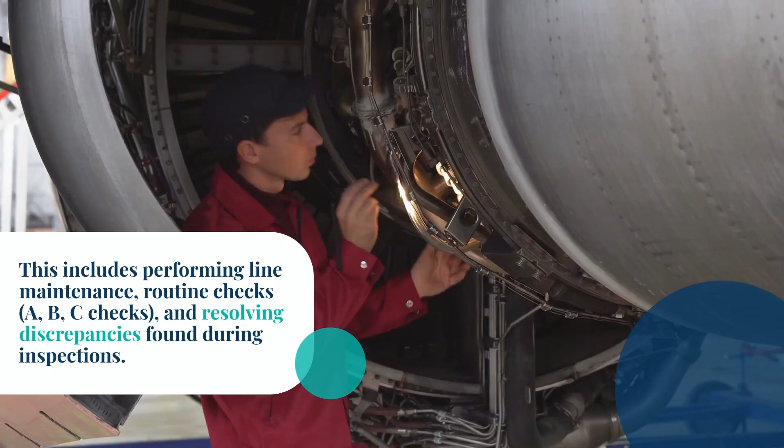1. Can you describe your experience with aircraft maintenance and repair? Throughout my career, I've gained hands-on experience in both scheduled and unscheduled aircraft maintenance. This includes performing line maintenance, routine checks (A, B, C checks), and resolving discrepancies found during inspections. I've worked on hydraulic, pneumatic, electrical, and fuel systems, ensuring all repairs meet airworthiness standards.

My role often involves troubleshooting faults, replacing defective components, and performing system tests to ensure reliability and safety. I've also been responsible for maintaining detailed maintenance logs and coordinating with technical teams and OEMs to resolve complex issues. My experience has taught me to work efficiently under pressure, especially during aircraft turnaround times. I consistently follow the Aircraft Maintenance Manual (AMM), Illustrated Parts Catalog (IPC), and all relevant regulations. My goal is to keep aircraft airworthy while minimizing downtime, ensuring safety and efficiency are never compromised.

2. What types of aircraft have you worked on previously? I have worked on a range of commercial and regional aircraft, gaining experience on Boeing 737 and Airbus A320 family jets, as well as Embraer 190s. My responsibilities included performing line maintenance, fault diagnostics, and major overhauls on these aircraft types. I've also been involved in component replacement, software updates, and system checks specific to each aircraft's design and operational requirements. Working across different models has helped me understand their unique mechanical and electronic systems, maintenance planning, and OEM compliance procedures.

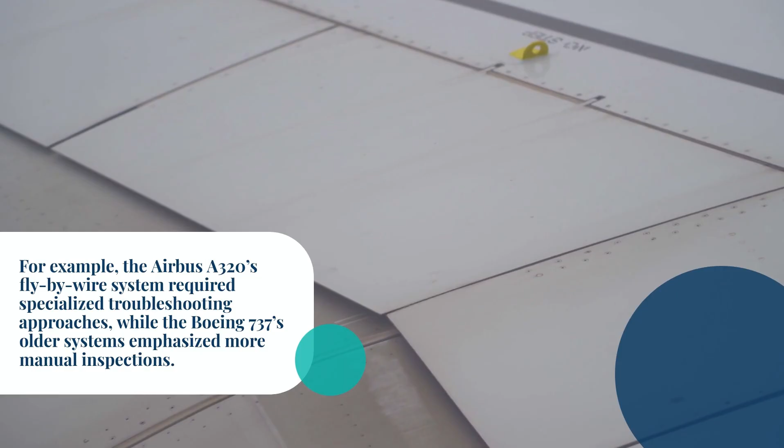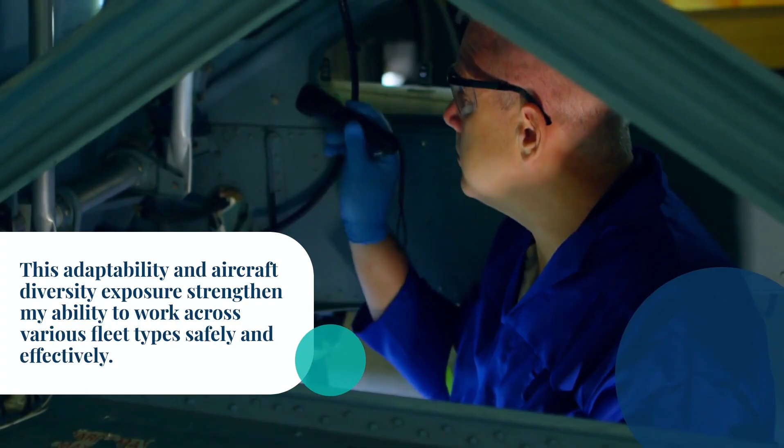For example, the Airbus A320's fly-by-wire system required specialized troubleshooting approaches, while the Boeing 737's older systems emphasized more manual inspections. My broad experience allows me to adapt quickly when transitioning to new aircraft types, and I consistently refer to each model's specific AMM and fault isolation manuals (FIMs). This adaptability and aircraft diversity exposure strengthen my ability to work across various fleet types safely and effectively.

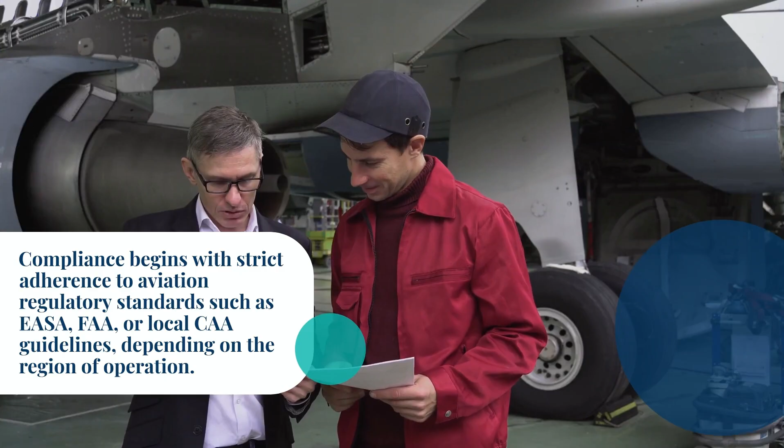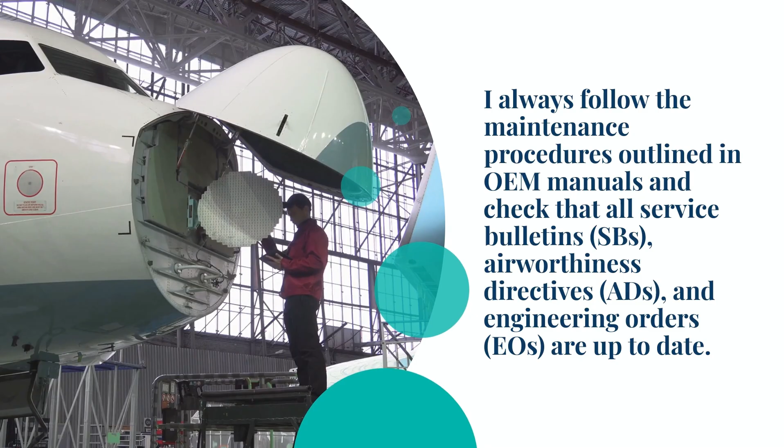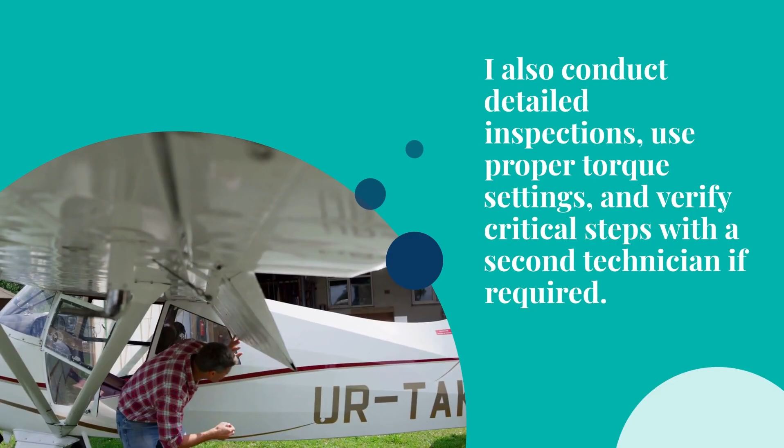3. How do you ensure compliance with aviation safety regulations? Compliance begins with strict adherence to aviation regulatory standards such as EASA, FAA, or local CAA guidelines, depending on the region of operation. I always follow the maintenance procedures outlined in OEM manuals and check that all service bulletins (SBs), airworthiness directives (ADs), and engineering orders (EOs) are up to date. Before performing any task, I review the latest documentation and ensure required tools and parts meet calibration and certification standards. I also conduct detailed inspections, use proper torque settings, and verify critical steps with a second technician if required.

Accurate record keeping is essential. I ensure all work is logged in the maintenance management system and signed off by appropriately licensed personnel. Regular training and audits help me stay informed of any changes in safety regulations. Ultimately, compliance is about fostering a safety-first mindset across the team, encouraging accountability, and never cutting corners regardless of time or budget pressures.

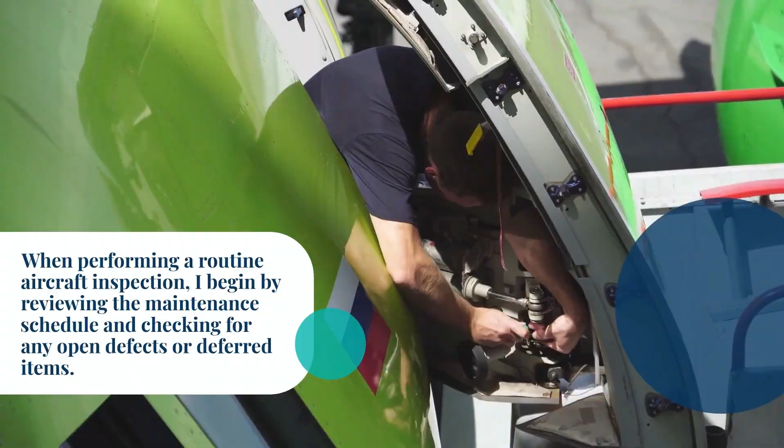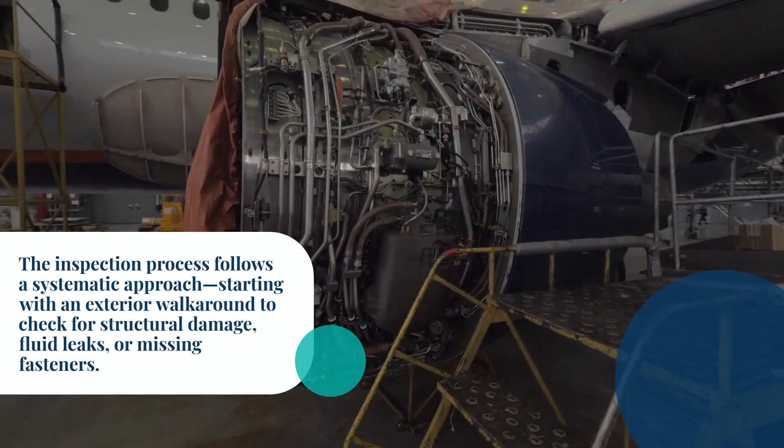4. What steps do you follow when conducting a routine aircraft inspection? When performing a routine aircraft inspection, I begin by reviewing the maintenance schedule and checking for any open defects or deferred items. I gather the necessary tools, manuals, and safety equipment, and verify the aircraft's documentation to confirm airworthiness status. The inspection process follows a systematic approach, starting with an exterior walk-around to check for structural damage, fluid leaks, or missing fasteners. I then move to internal systems, examining avionics, hydraulics, landing gear, control surfaces, and engine compartments based on the inspection type, e.g., A-check or

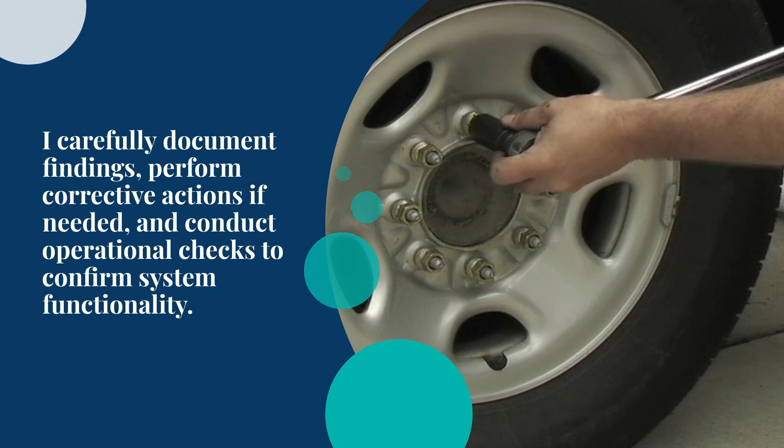C-check. I carefully document findings, perform corrective actions if needed, and conduct operational checks to confirm system functionality. Finally, I update the technical logs, ensuring all entries are accurate and signed off. Safety is prioritized at every stage, and inspections are never rushed, regardless of time constraints.

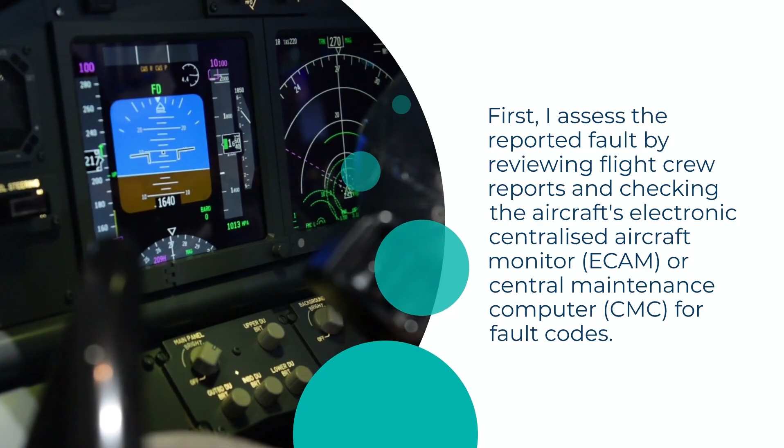5. How do you handle unexpected technical issues during a pre-flight check? When an unexpected issue arises during a pre-flight check, I remain calm and follow a structured troubleshooting process. First, I assess the reported fault by reviewing flight crew reports and checking the aircraft's Electronic Centralized Aircraft Monitor (ECAM) or Central Maintenance Computer (CMC) for fault codes. I consult the Aircraft Fault Isolation Manual (FIM) or Troubleshooting Manual to identify potential causes.

After isolating the issue, I perform visual and operational checks, using calibrated tools or test equipment if necessary. If parts need replacement, I ensure correct part numbers and certifications before installation. All actions are documented in the aircraft's technical log, and I consult with senior engineers or maintenance control if the issue is complex or time-sensitive.

Communication with the flight crew is key, keeping them updated while ensuring no compromises on airworthiness. If the issue can't be resolved in time, I recommend grounding the aircraft until fully rectified.

What is your experience with avionics systems and troubleshooting them?

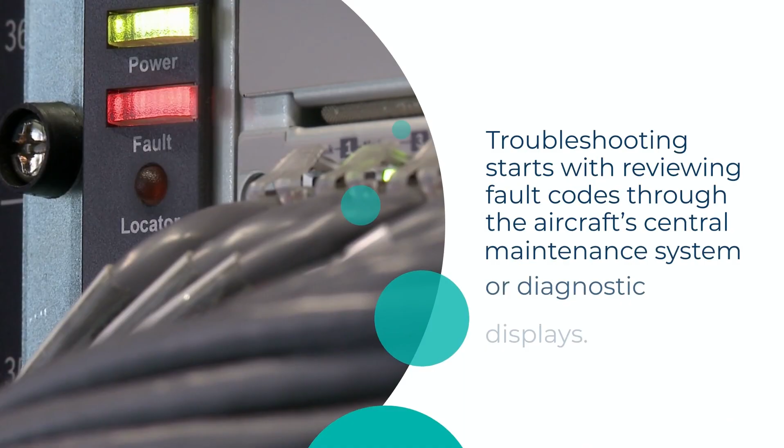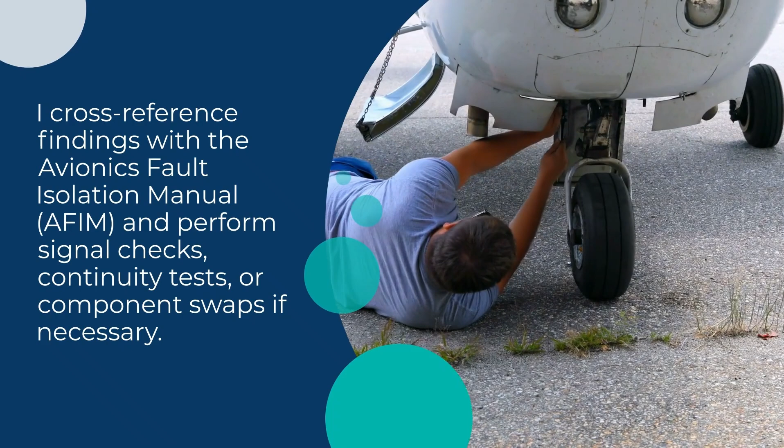I've worked extensively with avionics systems, including flight management systems (FMS), autopilot, communication and navigation equipment, and electronic flight instrument systems (EFIS). Troubleshooting starts with reviewing fault codes through the aircraft's central maintenance system or diagnostic displays. I cross-reference findings with the Avionics Fault Isolation Manual (AFIM), and perform signal checks, continuity tests, or component swaps if necessary. I've resolved issues such as unreliable altitude readings, navigation discrepancies, and faulty transponder responses.

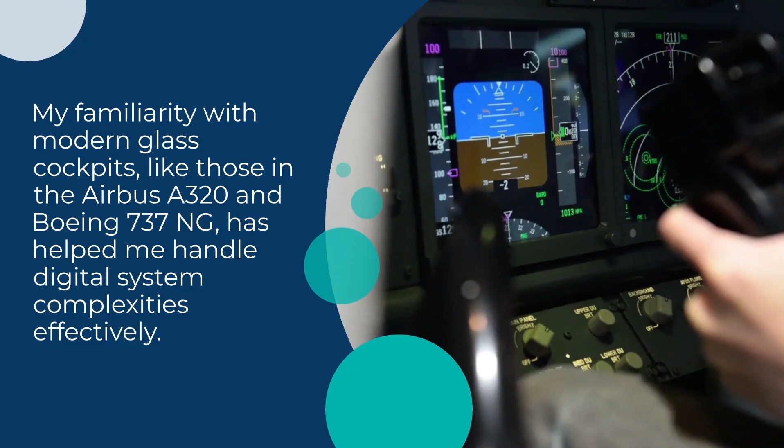My familiarity with modern glass cockpits, like those in the Airbus A320 and Boeing 737NG, has helped me handle digital system complexities effectively. I always verify software configurations and ensure firmware updates are correctly applied. Safety and documentation are crucial, so every action is logged precisely, and repaired systems are tested thoroughly before return to service. I stay current with training on evolving avionics technologies, including satellite communications and integrated modular avionics (IMA), to maintain my troubleshooting proficiency.

How do you document maintenance and repair work?

Accurate and detailed documentation is vital in aviation maintenance. After completing any maintenance task or repair, I record the job in the aircraft's maintenance logbook and/or the airline's computerized maintenance tracking system, e.g. AMOS, TRAX, or CAMP. Entries include the date, time, aircraft registration, task card reference, description of the work performed, part numbers, serial numbers, and technician license numbers. I also record torque settings, test results, and any replaced components, ensuring traceability.

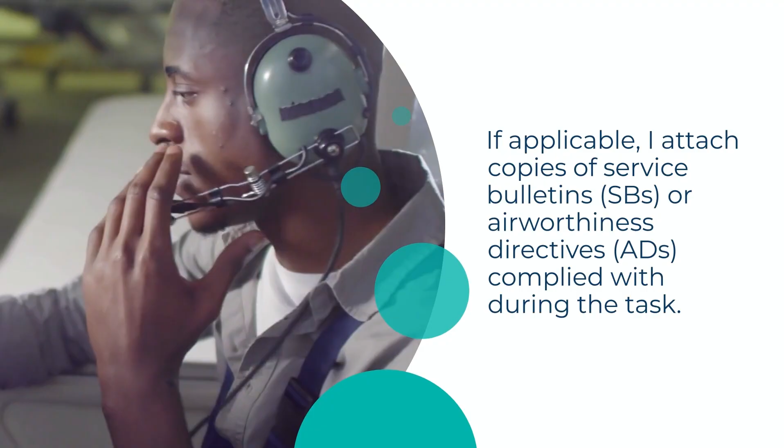If applicable, I attach copies of service bulletins (SBs) or airworthiness directives (ADs) complied with during the task. Once completed, I review the entries with a licensed engineer or inspector who signs off on the job. This ensures regulatory compliance and airworthiness. My approach is to always maintain transparency and accountability through clear, consistent records, which supports audits, improves reliability analysis, and contributes to the overall safety culture within the maintenance organization.

Describe a time when you found a critical fault in an aircraft. What did you do? During a routine A-check on an Airbus A320, I discovered a hydraulic leak near the landing gear actuator.

The leak was minor but located dangerously close to electrical wiring. I immediately reported the issue to the certifying engineer and isolated the aircraft to prevent further pressure buildup in the system. After referencing the Aircraft Maintenance Manual (AMM), I disassembled the affected section and found a cracked hydraulic fitting. I replaced the part with a certified component, cleaned the area thoroughly, and conducted a full hydraulic system pressure test.

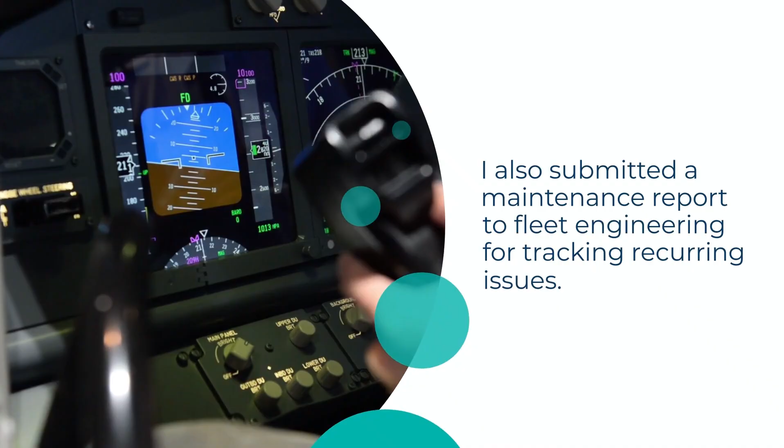Once the system was verified as leak-free, I documented the repair and had it signed off by a licensed engineer. I also submitted a maintenance report to Fleet Engineering for tracking recurring issues. This incident reinforced the importance of thorough inspections, even during routine checks, and demonstrated my ability to act quickly and responsibly when identifying safety-critical defects.

What are the most important checks during an A-check and C-check? An A-check is a relatively light, scheduled maintenance inspection performed approximately every 400 to 600 flight hours.

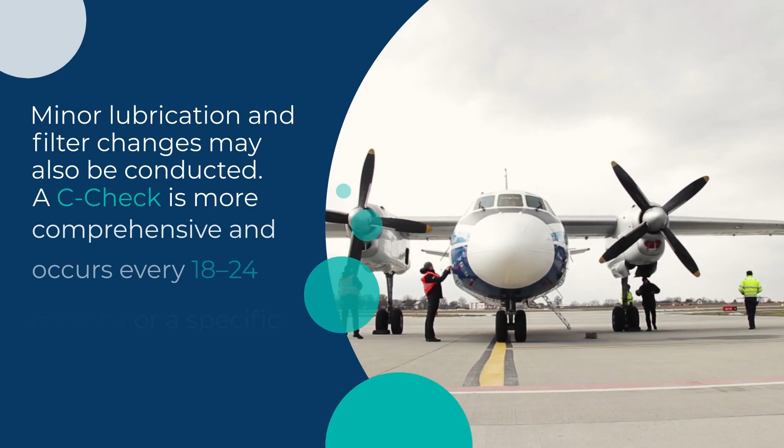Key tasks include checking fluid levels, inspecting emergency equipment, verifying avionics functionality, testing lighting systems, and visual inspections of the fuselage, wings, and engines. Minor lubrication and filter changes may also be conducted.

A C-check is more comprehensive and occurs every 18 to 24 months or a specific number of flight hours. It includes all A-check tasks plus in-depth inspections of aircraft structures, landing gear, cargo compartments, flight control systems, and major mechanical and electrical systems. Components are removed for inspection, non-destructive testing (NDT) may be used, and software or firmware updates are often applied. Cabin interior, safety systems, and corrosion control are also reviewed.

In both checks, adherence to task cards and manufacturer instructions is critical, as is proper documentation. Safety, compliance, and minimizing downtime are my top priorities during all inspection phases.

How do you stay updated with changes in aviation regulations and technologies? Staying current is essential in aviation due to constantly evolving regulations and technologies. I regularly attend in-house training programs and recurrent courses offered by my employer or certified training organizations.

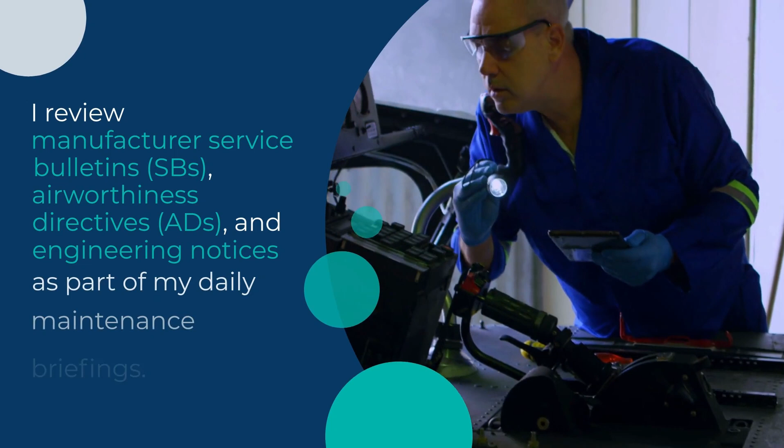I also maintain subscriptions to industry publications such as Aviation Week, Flight Global, and updates from regulatory bodies like EASA, FAA, and ICAO. I review manufacturer service bulletins (SBs), airworthiness directives (ADs), and engineering notices as part of my daily maintenance briefings. Online forums and communities like the Aircraft Maintenance Technicians Association (AMTA) and LinkedIn aviation groups also provide valuable insights from other professionals.

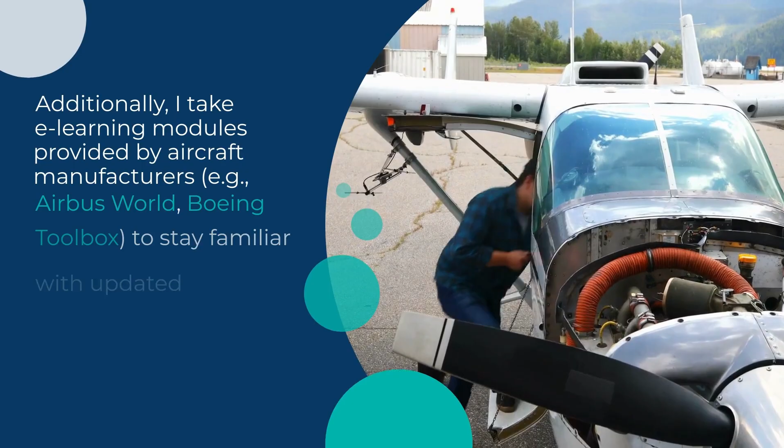Additionally, I take e-learning modules provided by aircraft manufacturers, e.g. Airbus World, Boeing Toolbox, to stay familiar with updated maintenance procedures and technological advancements like composite repairs, electric taxiing systems, and avionics integration.

Continuous learning ensures I maintain high standards in my work and can confidently implement new practices in a safe, compliant, and efficient manner. 11. What software tools or diagnostic equipment are you proficient in?

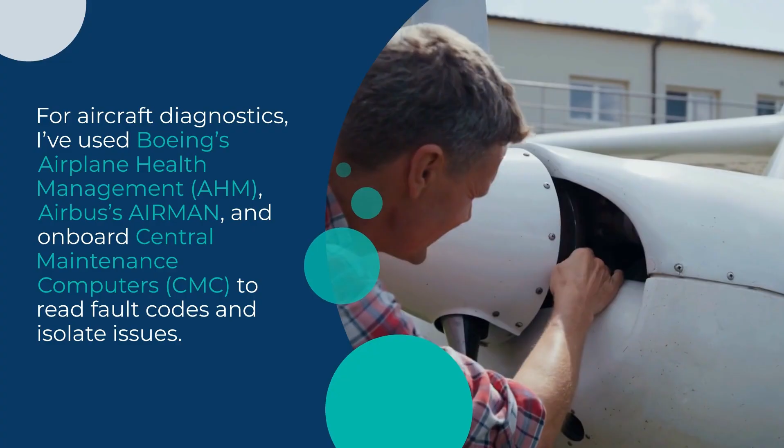I am proficient in several aircraft maintenance and diagnostic software tools, including AMOS, TRAX, and CAMP for maintenance tracking and planning. These systems help manage scheduled maintenance, monitor component life cycles, and ensure compliance with regulations. For aircraft diagnostics, I've used Boeing's Airplane Health Management (AHM), Airbus's AIRMAN, and onboard central maintenance computers (CMC), to read fault codes and isolate issues.

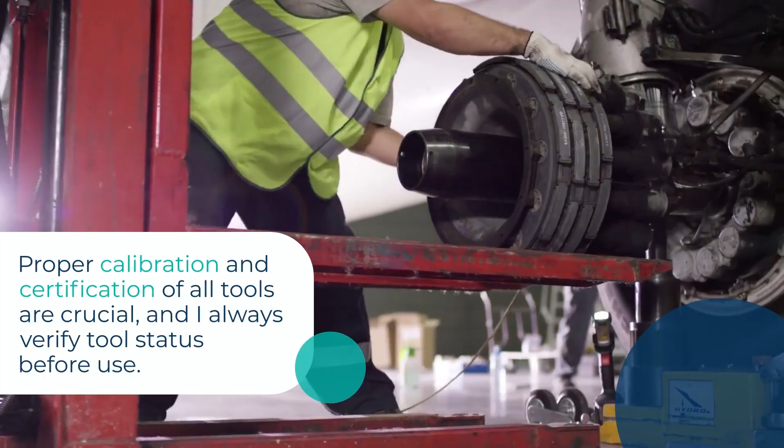I'm also comfortable using OEM-provided tools like Boeing Toolbox and Airbus World for technical documentation and service bulletins. In terms of physical diagnostic equipment, I'm experienced with multimeters, borescopes, pitot-static testers, and hydraulic pressure testers. I also use non-destructive testing (NDT) tools like ultrasonic and dye-penetrant kits during structural inspections. Proper calibration and certification of all tools are crucial, and I always verify tool status before use.

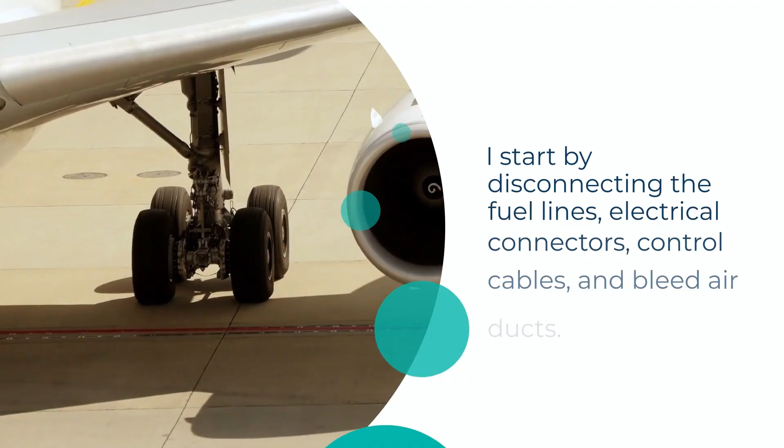Engine removal and installation is a precise, safety-critical process. First, I review the Aircraft Maintenance Manual (AMM) for the specific procedure and ensure all required tools, fixtures, and safety gear are available. I start by disconnecting the fuel lines, electrical connectors, control cables, and bleed air ducts. Then I deactivate and lock out relevant systems to prevent accidental operation. Once all components are disconnected, I support the engine with an approved stand or hoist and carefully unbolt it from the pylon or wing structure. Removal is completed with checks to prevent any structural or component damage.

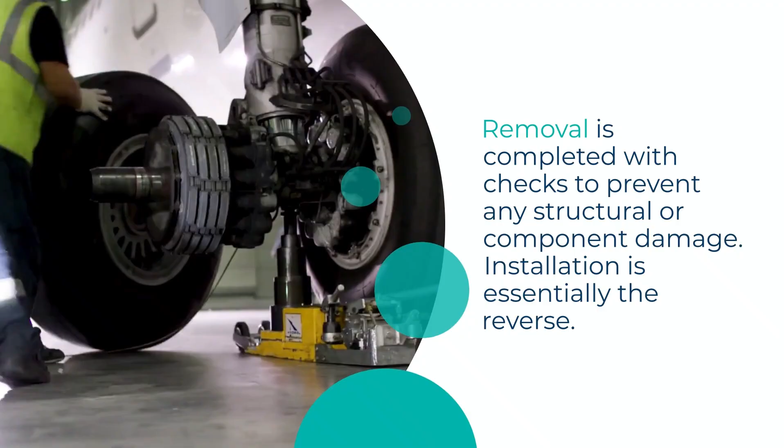Installation is essentially the reverse. The new or overhauled engine is aligned and mounted correctly using torque-specified bolts. All connections are reattached, secured, and double-checked. I then perform leak checks, engine run-ups, and operational tests to ensure all systems are functioning correctly. Detailed documentation and sign-offs follow, verifying the aircraft's airworthiness before return to service.

13. How do you ensure all work is completed according to the manufacturer's specifications? I strictly follow the Aircraft Maintenance Manual (AMM), Component Maintenance Manuals (CMMs), and other OEM-issued documents such as Service Bulletins (SBs) and Airworthiness Directives (ADs) for every task. Before starting a job, I review the relevant task card and cross-reference it with the latest version of the AMM to ensure instructions are current.

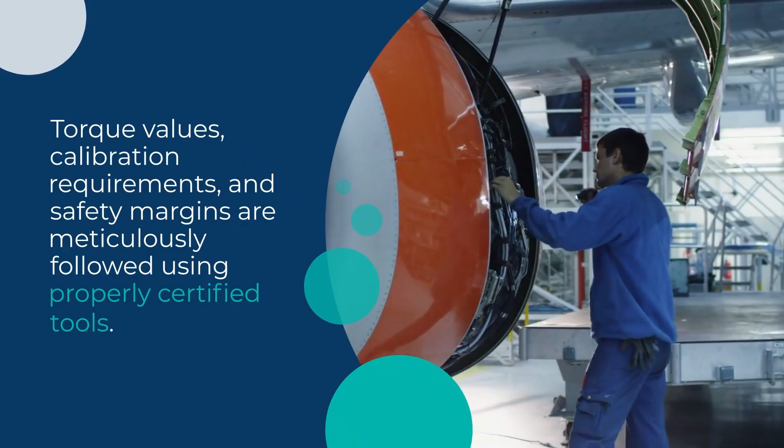I verify that all parts used have the correct part number, serial number, and airworthiness certification. Torque values, calibration requirements, and safety margins are meticulously followed using properly certified tools. During complex tasks, I consult with a licensed engineer or quality assurance inspector to double-check critical steps. Work is documented thoroughly, and inspections are conducted at each stage as needed. Additionally, I attend recurrent training and technical briefings to stay updated on procedural changes. Ensuring compliance with OEM standards is fundamental not only to safety, but also to maintaining the reliability and longevity of the aircraft.

14. What do you do if you disagree with another engineer's assessment? Disagreements in technical assessments can occur, and it's important to approach them professionally and objectively. If I disagree with another engineer's evaluation, I first seek to understand their reasoning by discussing the issue in detail and reviewing the documentation or fault data together.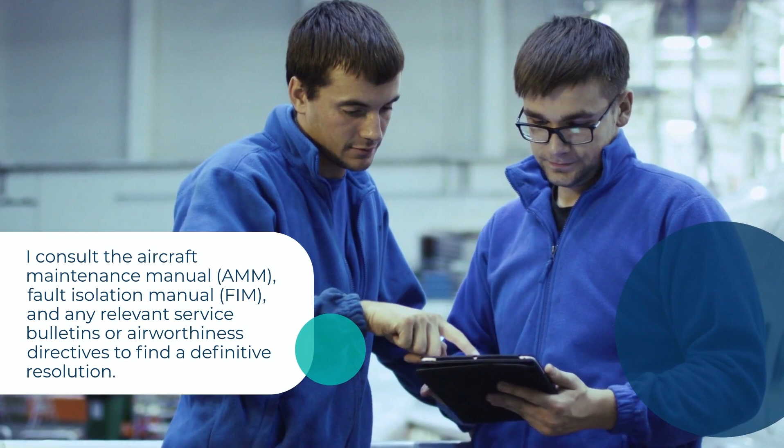I consult the Aircraft Maintenance Manual (AMM), Fault Isolation Manual (FIM), and any relevant service bulletins or airworthiness directives to find a definitive resolution. If the disagreement persists, I escalate the matter to a licensed certifying engineer or shift supervisor for a final decision. Safety is the top priority, so I never proceed with work unless I am confident the correct and compliant course of action is being taken. I document the issue accurately, noting any actions taken or advice received. Open communication and mutual respect are key to resolving such situations constructively and ensuring the continued airworthiness of the aircraft.

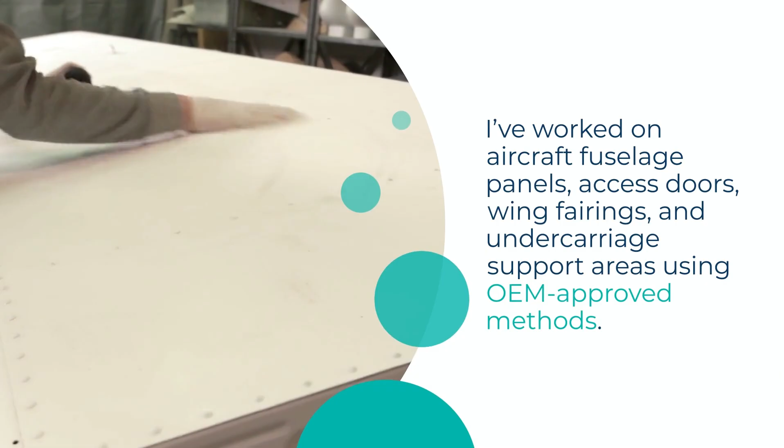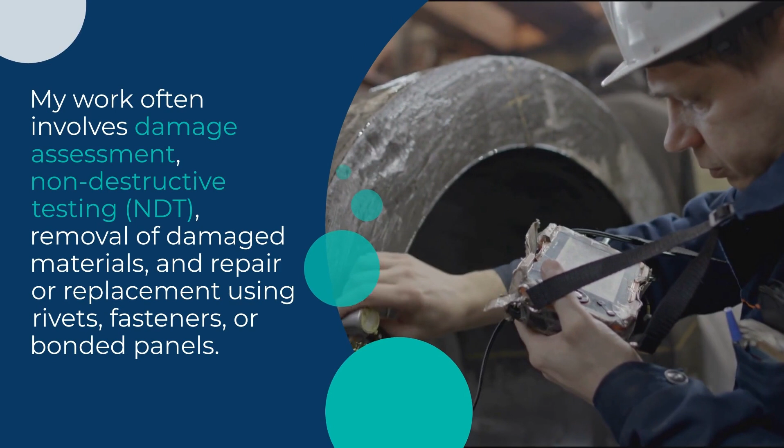15. Describe your experience with aircraft structural repairs. I have hands-on experience with a wide range of structural repairs, from minor sheet metal patching to more complex structural component replacements. I've worked on aircraft fuselage panels, access doors, wing fairings, and undercarriage support areas using OEM-approved methods. My work often involves damage assessment, non-destructive testing (NDT), removal of damaged materials, and repair or replacement using rivets, fasteners, or bonded panels. I refer to the Structural Repair Manual (SRM) for repair limits and instructions, ensuring compliance with manufacturer specifications.

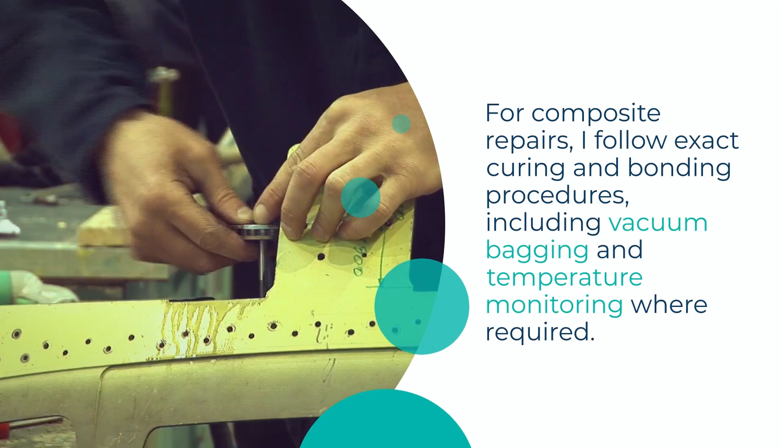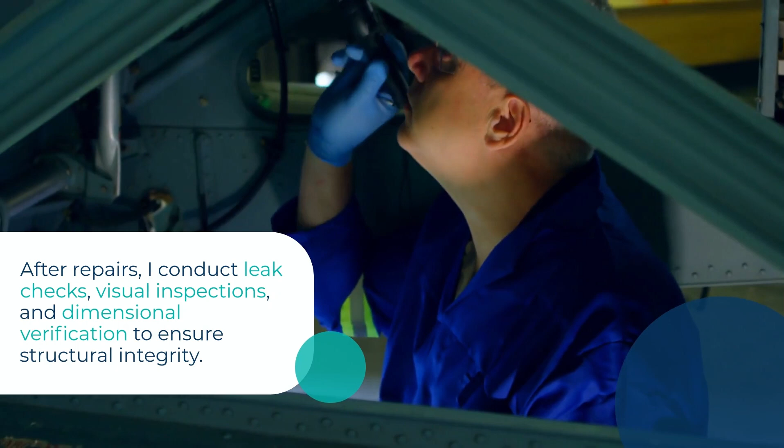For composite repairs, I follow exact curing and bonding procedures, including vacuum bagging and temperature monitoring where required. Precision and cleanliness are crucial, especially when dealing with pressurized structures. After repairs, I conduct leak checks, visual inspections, and dimensional verification to ensure structural integrity. I always coordinate with quality assurance and licensed engineers for inspections and sign-offs. My methodical approach ensures durable, compliant repairs that restore full airworthiness. 16.

What is your approach to managing time under tight maintenance schedules?

Working under tight schedules is common in aviation, especially during turnaround or AOG situations. My approach starts with prioritizing tasks based on safety, regulatory compliance, and operational impact. I begin by thoroughly reviewing the job cards and planning the sequence of tasks with the team. Clear communication with colleagues, certifying staff, and support departments ensures everyone is aligned.

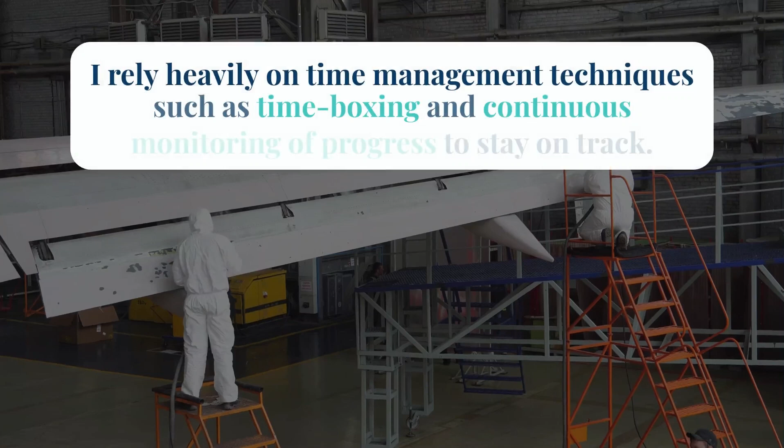I group similar tasks to avoid duplication of effort and use downtime efficiently by preparing tools, documentation, and components in advance. I rely heavily on time management techniques such as time boxing and continuous monitoring of progress to stay on track. If delays occur, I promptly escalate the issue or seek alternative resources.

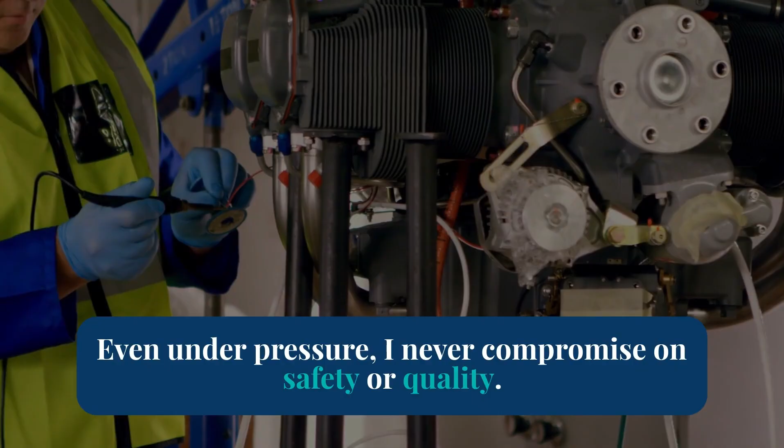Even under pressure, I never compromise on safety or quality. My experience has taught me how to balance speed and precision while maintaining full compliance with aviation standards, which is critical in maintaining airworthiness without delays.

17. How do you prioritize maintenance tasks during a turnaround?

During a turnaround, time is limited, so task prioritization is key. I begin by addressing safety-critical and flight-essential systems first, such as brakes, engines, flight controls, and avionics. I consult the aircraft's technical log and review any defects reported by the flight crew. Deferred defects with MEL, minimum equipment list, provisions are considered next, ensuring they are within allowable limits.

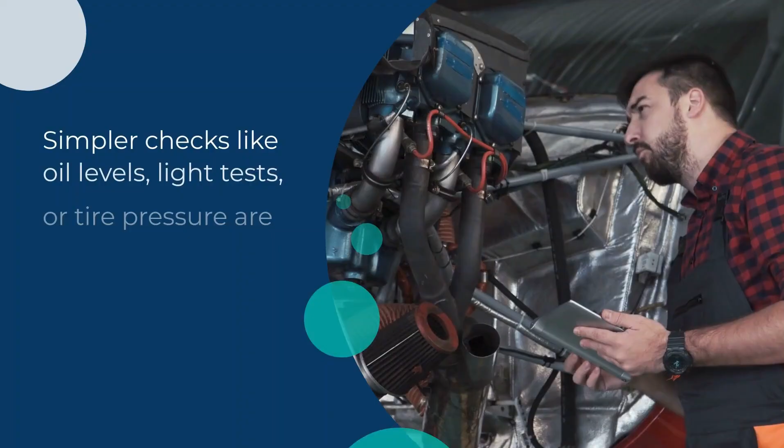I assign tasks based on urgency, resource availability, and the complexity of each issue. Team coordination is essential, so I communicate with other engineers and ground handlers to avoid bottlenecks and overlapping work. Simpler checks like oil levels, light tests, or tire pressure are completed while awaiting parts or documentation for larger tasks.

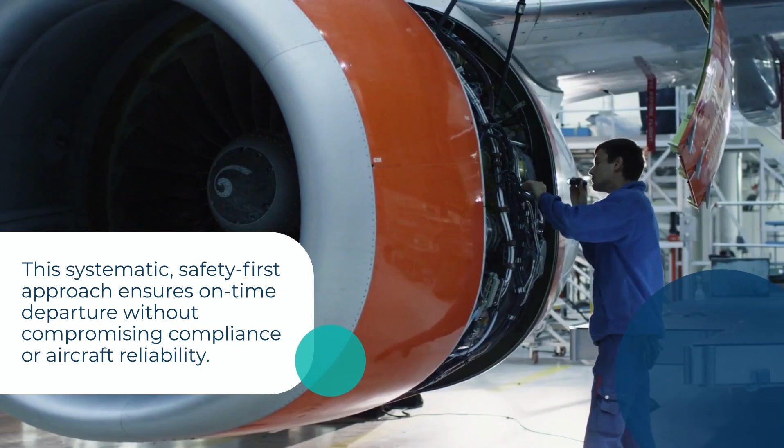I always factor in sign-off requirements to ensure each job is completed and recorded before departure. This systematic, safety-first approach ensures on-time departure without compromising compliance or aircraft reliability.

18. Tell us about a challenging engineering problem you solved.

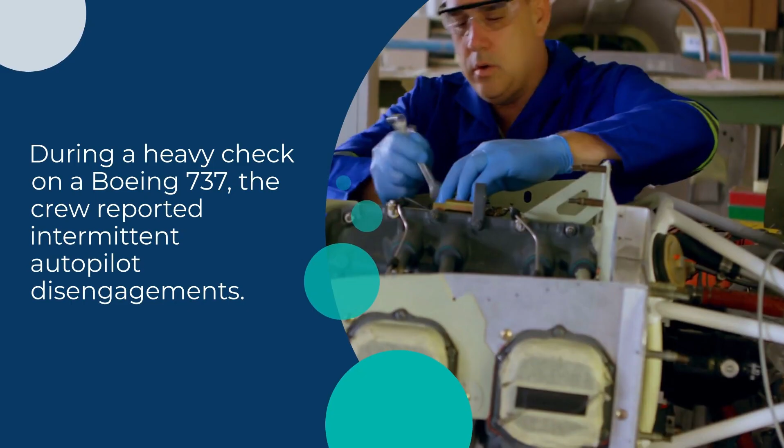During a heavy check on a Boeing 737, the crew reported intermittent autopilot disengagements. Initial inspections and fault codes pointed to the yaw damper system, but multiple components tested within limits. I reviewed previous maintenance records and discovered similar complaints dating back months.

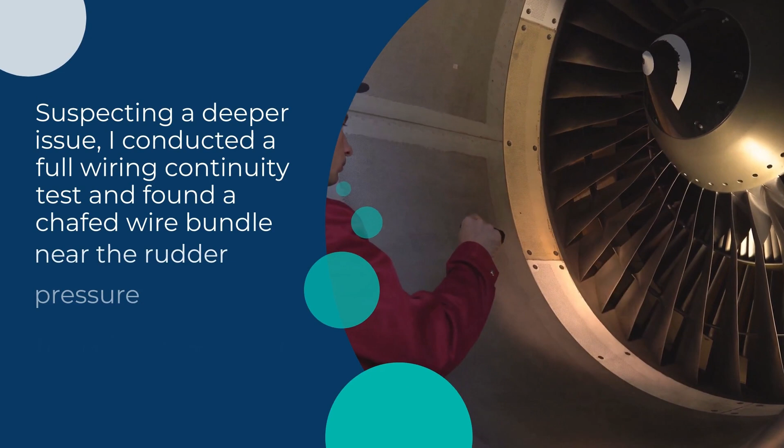Suspecting a deeper issue, I conducted a full wiring continuity test and found a chafed wire bundle near the rudder pressure transducer, an area rarely inspected. The damaged wires were causing signal interference.

I repaired the wiring per the Standard Wiring Practices Manual, SWPM, rerouted the harness for better clearance, and conducted a successful system test and flight verification.

This issue required persistence, teamwork, and a methodical approach to isolate. It reminded me that not all problems are straightforward and reinforced the importance of root cause analysis over quick fixes. The fix not only solved the problem but also prevented future occurrences, improving fleet reliability.

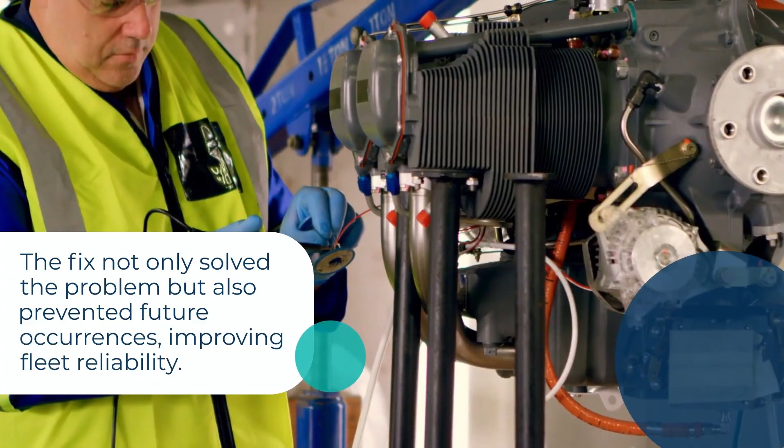19. How do you ensure all parts and materials meet airworthiness standards?

Before using any part or material, I verify its airworthiness certification, checking the Certificate of Conformance, COC, EASA Form 1, or FAA 8130-3 tag, depending on the regulatory authority.

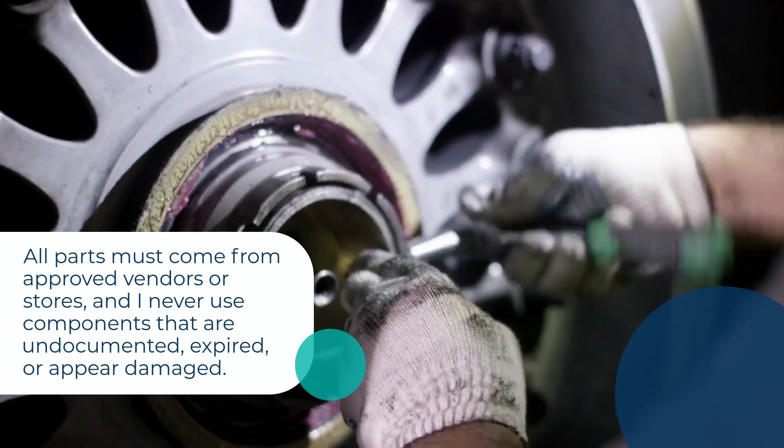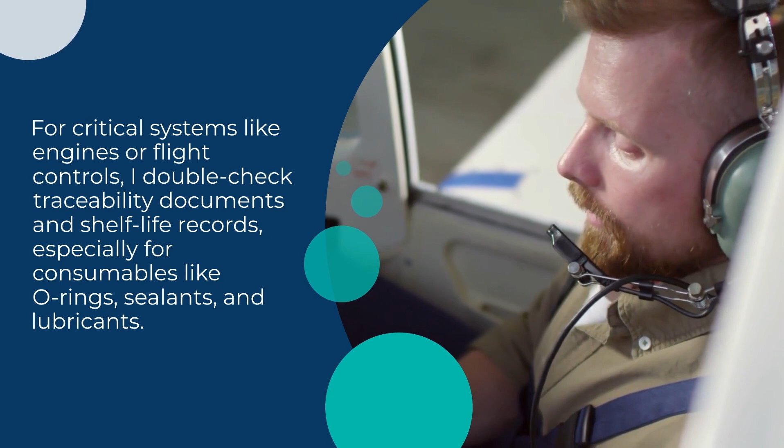I also inspect for correct part numbers, serial numbers, and batch details to match the aircraft's Illustrated Parts Catalog, IPC. All parts must come from approved vendors or stores, and I never use components that are undocumented, expired, or appear damaged. For critical systems like engines or flight controls, I double-check traceability documents and shelf life records, especially for consumables like O-rings, sealants, and lubricants.

I cross-reference part applicability using the aircraft effectivity list. After installation, I document the part's usage in the aircraft logbook and maintenance system, ensuring compliance. Regular audits, internal training, and a clear understanding of regulations help me maintain high standards. This meticulous approach ensures both legal compliance and the operational safety of the aircraft.

20. Why did you choose to become an aircraft engineer, and what motivates you in this role?

I chose to become an aircraft engineer because of my passion for aviation and fascination with how complex machines operate and fly. From a young age, I was captivated by aircraft, and this curiosity evolved into a desire to work behind the scenes, ensuring their safety and performance.

What motivates me daily is the responsibility of maintaining the highest safety standards and the satisfaction of solving technical problems under pressure. I find it rewarding to know that my work directly impacts passenger safety and airline efficiency. Every aircraft that leaves the ground safely after a maintenance task gives me a sense of accomplishment.

I also enjoy the continuous learning aspect, keeping up with new technologies, aircraft systems, and evolving regulations. This role combines hands-on technical work with critical thinking and teamwork, making it both challenging and fulfilling. Being part of the aviation safety chain is what drives me to excel.